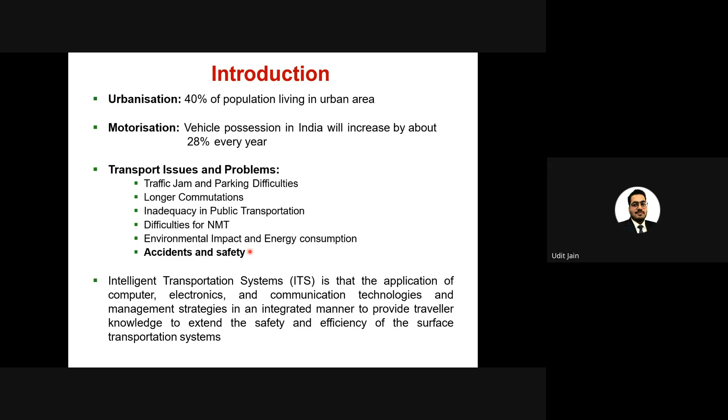If you look at the leading causes of death two decades ago, it was heart disease and cerebrovascular disease, which were the top ones, and road traffic injuries used to fall at around number nine. In the past two decades, it has already bumped up, and by 2030 it is expected to reach number five, bypassing major diseases like HIV/AIDS, stomach cancer, and diabetes. Road traffic injuries will be the fifth leading cause of deaths.

If you look at the fatalities of different types of road users, in different parts of the world the numbers and proportions are different. But if we look at Southeast Asian countries, where India also lies, 43% of fatalities are motorized two-wheelers and three-wheelers—they are the vulnerable road users. Whereas in other countries where the proportion of cars is much higher, in Southeast Asian countries the proportion of cars is just 16%.

So to understand road safety and its move towards sustainability, we have to first understand what we can do to improve safety, and then how we can bring sustainability into the safety of road users.

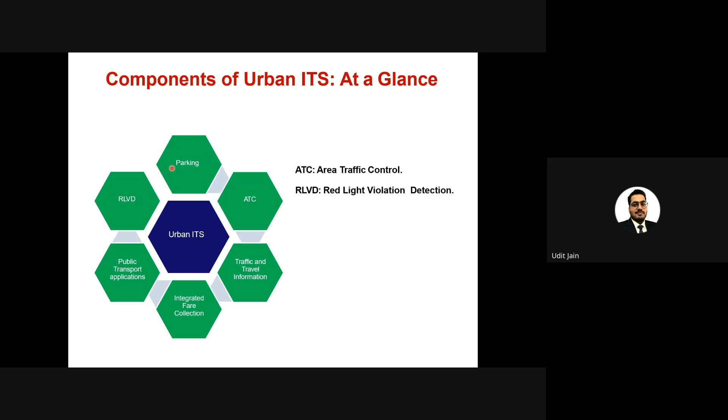There is much more in urban ITS which can help us in improving road safety as well as improving sustainability issues that are arising due to the increase in traffic and congestion happening due to the increase in number of vehicles and number of trips that we're making.

One of these components is advanced traveler information system, called ATIS. An ATIS can be utilized for two different purposes. One is a public transport system can use an ATIS where you can have real-time information about different public transport routes, upcoming arrivals, and how reliably the public transport system is following its pre-decided schedule.

This leads to a sense of reliability on the public transportation network. If you have traveled by a metro rail system versus a bus system, the primary difference is that metro systems have an inbuilt ATIS where even if you are not at the metro station, on your phone you can check when the next metro is going to arrive. And even at the station, variable message signboards show the next arrival in 5 minutes, 3 minutes, 2 minutes—it's written everywhere, and the metro actually arrives at that time.

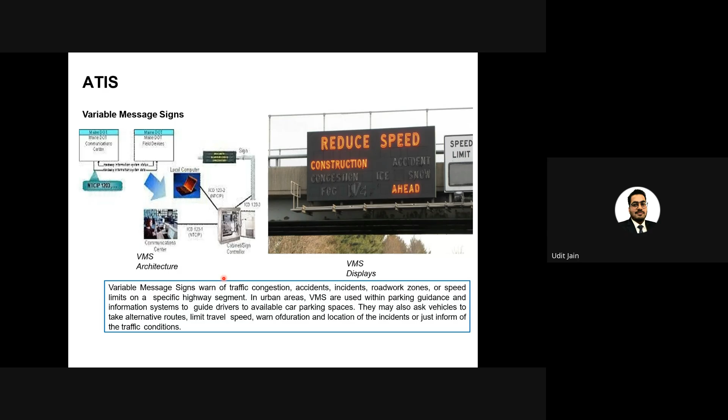The earlier versions of ATIS used to be signboards like this. Nowadays we have digital LED screens where we can display pretty much any kind of information for the road user. Earlier versions of ATIS also used to have radio channels where people could communicate with one another with the help of radio frequencies.

There are various kinds of ITS applications in transportation where we use different kinds of sensors for acquiring data. We use inductive loops, passenger counters, piezo sensors, lasers, radar, CCTV. There are so many things available today. For communication, the way vehicles communicate with each other has changed drastically. Data analysis and data mining have also improved many folds.

If we look at the traveler information system, the previous versions of VMS were quite rudimentary - fixed messages and radio waves used to be there. Now we have true VMS where we can display pretty much everything. We even have in-vehicle information systems where we can relay important information for drivers, giving them useful information at the right time, which can be very helpful for a driver to make correct decisions while driving.

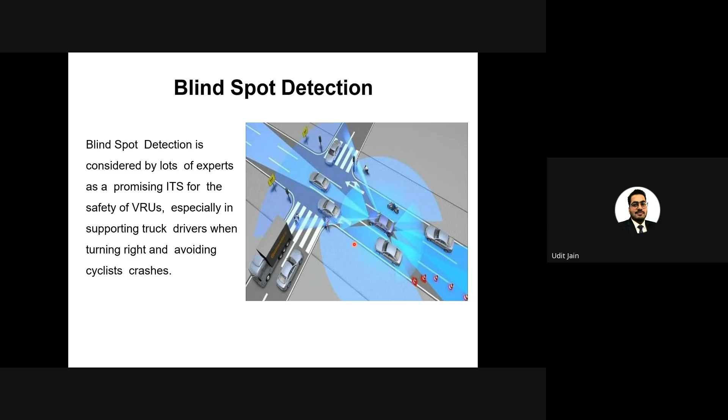In such scenarios for blind spot detection, ITS works very well. In the new cars coming after 2020-2022, since BS6 has been implemented, the technological advancements in cars have increased many folds. So several cars now come with blind spot detection. Earlier versions of cars used to have just parking sensors where if something came close to your rear bumper, your car would beep. Now you have 360-degree sensors where if anything is in your blind spot, any obstruction, vehicle, passenger or pedestrian, the driver will get alerts.

The alerts can be for a pedestrian, that's called a pedestrian detection system. It could be an alert in the form of a beep, or in the form of a flash, there can be various types of alerts. It can also be coupled with AEB, that is advanced emergency braking. So it's not just detection and alarm, it also takes control of the car to have automated emergency braking, ensuring that the vehicle does not hit a pedestrian or a bicyclist. These systems already exist.

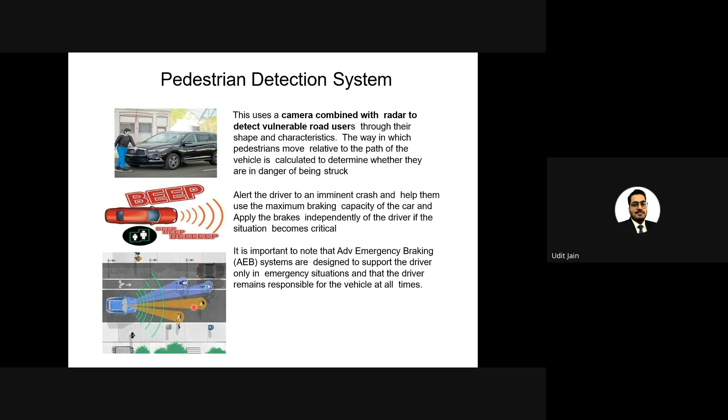If anybody is aware of ADAS level 2, that is advanced driver assistance systems, which are of this generation, coming in cars now. Various cars have launched ADAS level 2. Honda has launched ADAS level 2, the cheapest one you can find is in Honda Amaze. Then you can see ADAS level 2 in Tata cars, and in Mahindra cars. Obviously the foreign brands have had ADAS level 2 for a very long time, but I'm talking about Indian manufacturers. So ADAS level 2 has come into the Indian market, and Indian manufacturers have launched it with all these capabilities I'm talking about.

Then, pedestrian traffic signals. In most Indian cities, we either don't have pedestrian traffic signals, or even if we do, we don't really take them very seriously. A pedestrian traffic signal is generally coupled with the vehicular signals, and whenever the vehicular signal turns red, the pedestrian signal turns green. That's about what we do with the pedestrian traffic signal.

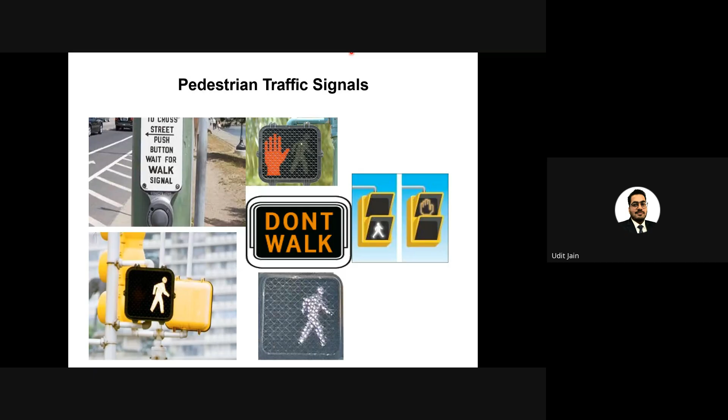But if you go abroad, if you visit Europe, UK, USA, and several other such countries where pedestrians are given a lot of importance and preference, you will find many different types of traffic signals which we don't have in our country. These are new for us, but they're quite old and useful, and people are used to them. They've been used for decades to ensure better pedestrian movement and safety. So we'll look at a couple of them.

One is an automatic pedestrian detection system, where with the help of either IR cameras or normal cameras using computer vision, one can detect that there is a pedestrian waiting or crossing, and accordingly the pedestrian traffic signal can be changed or exercised depending upon the detected pedestrian in the waiting area or the crossing area.

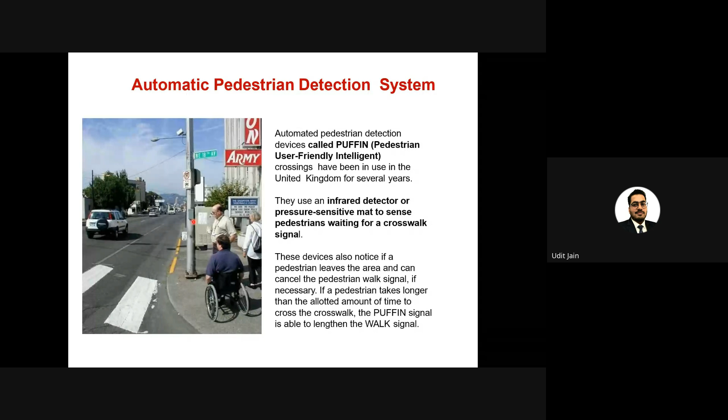Another form of pedestrian detection, the earlier one I was talking about, used infrared or computer vision cameras. The second one is with the help of a puffin signal, where puffin stands for pedestrian user friendly intelligent crossing. It's either an infrared detector or a pressure sensitive mat used to sense that a pedestrian is waiting at a crosswalk to cross the road. As soon as a pedestrian is detected, the signal cycle is automatically altered, and as soon as possible, a green phase is given to the pedestrian to safely cross the road.

Then one of the oldest types of pedestrian crosswalks is the pelican signal, or push button signal. You'll see a small box on either side of the crosswalk, and as a pedestrian, if you want to cross the road, you simply go and push a button there. After pushing that button, the signal cycle will be altered and a green phase will be given to the pedestrians who pushed the button to cross the road. This technology is called pelican crossing or the push button system.

At very few places in India this was implemented. I saw this once in Delhi near India Gate, but it was not successful, for two reasons: one, people were not aware what this is for, and secondly, even when the signal for pedestrians turned green, the motorists and vehicles did not actually stop to allow pedestrians to cross. These were the two observations for understanding why pelican crossings did not work. But that being said, these work beautifully in Western countries. I myself have traveled and used them, and if we press the button, within the next 5 to 15 seconds, we get a green phase, and vehicles do stop and allow you to cross.

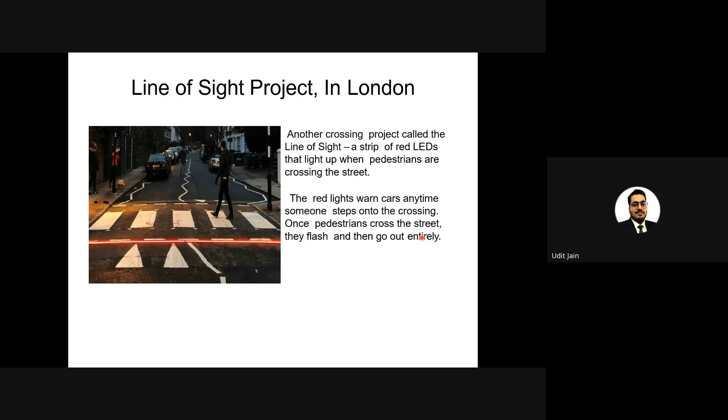This red light warns the cars anytime someone steps on the crossing, and once a pedestrian crosses the street, the lights flash and then simply turn off. So if there is no pedestrian, it would just look like a normal crosswalk.

Then again in London, there was another technology called the traffic tech switch pad. This pad detects whenever a pedestrian stands on it, and sends a signal to the traffic control lights, altering the signal phase whenever a pedestrian is detected. It can also cancel the signal if the pedestrian steps off the pad.

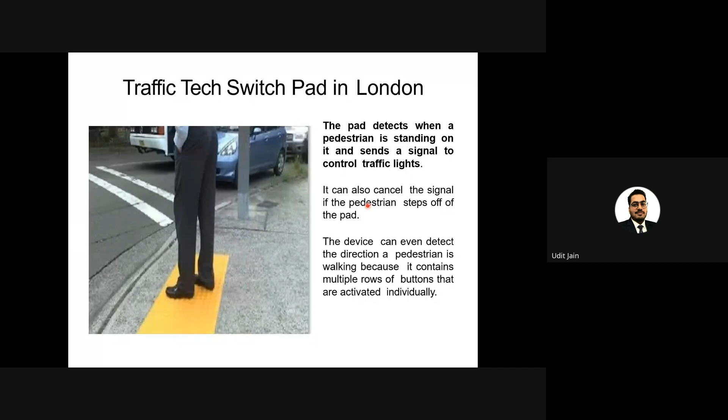The device can even detect the direction in which a pedestrian is walking, because it contains multiple rows of buttons that are activated individually. So this is like a pressure sensitive pad which detects if there is a pedestrian and in which direction they want to go.

Then there is the Starling crossing, which was also a very innovative way of ensuring pedestrian safety. If you step on the curb side where you want to cross the road, a crossing will automatically appear. It's a plain road, and as soon as a pedestrian comes, this crossing appears.

If a crowd wants to cross simultaneously, the crossing widens, and if someone staring at a smartphone veers into traffic, warning lights illuminate around them. These markings look similar to those usually painted on the road, but because they're created with LED lights, they can continually change.

This Starling crossing can be achieved either with LEDs or with projectors. Projectors would work only during night time, but that is where most safety issues take place. So a projector would simply project a crosswalk and the required illumination onto the road, allowing for a safe passage for the pedestrian.

Coming back to the advanced driver assistance system, that is ADAS. ADAS has evolved over decades. Earlier it was simple ADAS, then came ADAS level 1, then ADAS level 2. Now ADAS level 2 is in the market, commercially available in India as well, by Indian manufacturers.

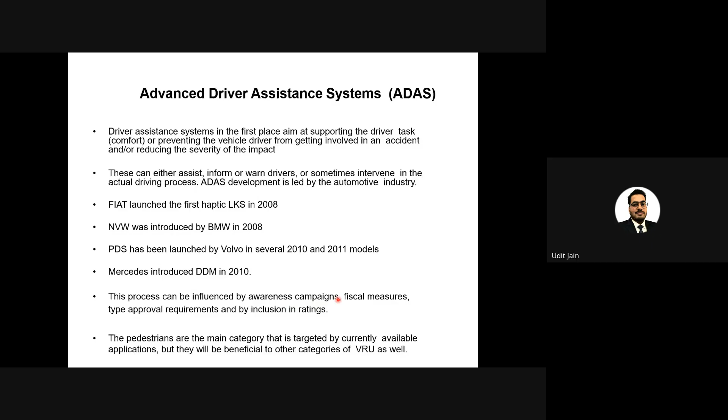NVW was introduced by BMW in 2008. Then PDS was launched by Volvo in 2010 and 2011 models, and Mercedes introduced DDM in 2010. We will look at some of these, and we even have some videos to show you. This procedure can be influenced by awareness campaigns, fiscal measures, and many other inclusion in ratings.

What an ADAS does is detect objects, detect hazardous road conditions, classify objects, and then either stop or slow down the vehicle if required. It is not just detecting objects and creating alarms. If it finds a hazardous condition developing, it can take control of your car, stop it, slow it down, or steer it to minimize damage. The first attempt is to entirely avoid the accident, either by braking or maneuvering, and if that's not possible, the idea is to minimize the impact as much as possible.

These have wide applications in blind spot monitoring, lane keep assistance, forward collision warning, and parking assist.

Blind spot monitoring we have just seen. Lane keep assistance means that if your vehicle is equipped with ADAS level 2 and you have turned on the lane keep assistance, your vehicle will keep driving in the same lane. If for any reason your vehicle tries to sway out of the lane, the steering will give you a haptic feedback - it will vibrate and slightly turn itself to keep your car in the traffic lane. That is lane keep assistance.

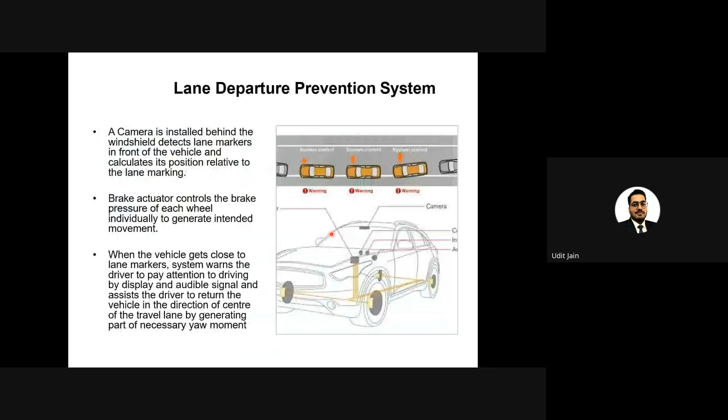Another application is advanced vehicle control. We just saw that by another name - it was forward collision warning.

Cruise control was there in ADAS level 1 also, where you can set a speed at which your car can keep moving automatically and you don't have to accelerate. But the problem is that if there is a vehicle in front of you, the car will not know when to slow down or stop - you will have to manually brake.

To solve that problem, ADAS level 2 now has AVCSS, Advanced Vehicle Control and Safety Systems. It detects how far the leading vehicle is from your vehicle, and depending upon a safety distance that you have set, if the leading vehicle brakes and comes too close, your vehicle will also automatically apply brakes and slow down. These anti-collision devices work together with cruise control to take partial control of your car, accelerating and braking automatically to maintain the same distance with the vehicle in front of you.

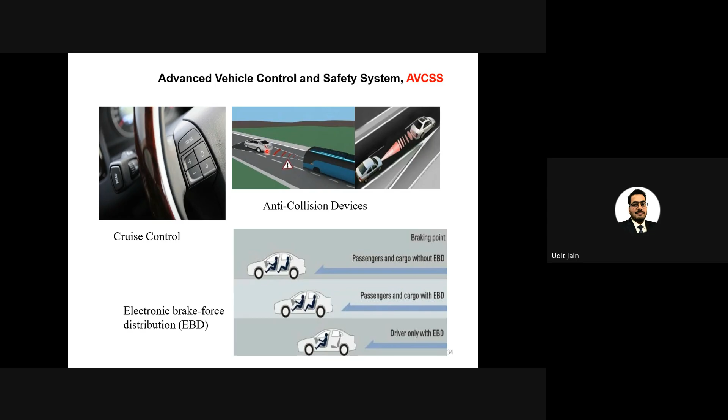Then there is Electronic Vehicle Stability Control, EVSC. This is a very interesting technology, and to the best of my knowledge it was first introduced by Mercedes.

Let's look at an example. Let's say I am this yellow car, and I see a vehicle that has broken down, and I have to suddenly change path. If at high speed I suddenly take a right turn, my vehicle can spin out of control and run off the road. An EVSC system does not allow your car to go off the road or spin like this - it makes sure your car smoothly transitions even at high speed and stays on the road.

It has yaw rate sensors which control the lateral acceleration of your car and make sure such scenarios do not occur. We'll see a short video of EVSC that will give us a good idea of what an EVSC system does.

As you drive, many forces act upon your vehicle. Is the video audible also? Yes, can you hear? Yes, it's audible and it's visible also.

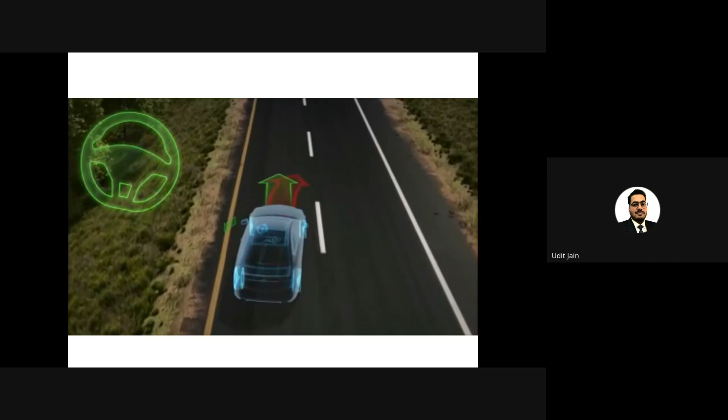As you drive, many forces act upon your vehicle. You probably feel some of them in everyday driving, like when you lean toward the side in a corner. When you turn the steering wheel, your car doesn't just move to one side, it actually rotates about a vertical axis. Under some conditions, the car might rotate too much or not enough, like when you swerve to avoid an obstacle, take a curve too fast, or encounter a slippery road. This is why Mercedes-Benz invented ESP, the Electronic Stability Program. ESP's network of sensors, one of the most advanced in the industry, continually monitors how well the car is carrying out the driver's orders. ESP compares your steering inputs to the speed of each wheel and the car's rotation. Within milliseconds, ESP can sense if the car is not following your intended course. When you quickly steer to avoid an obstacle, the car wants to continue straight ahead. ESP brakes the inside rear wheel. This creates a rotational force that helps the car steer where you tell it to. As you recover, the rear of the car can spin out. ESP brakes the outside front wheel to help rotate the car back on course. If necessary, ESP can also reduce the engine's power to help restore control more quickly. When the laws of physics meet human nature, ESP helps keep you on course and in control.

I hope that gave a clear idea of what an ESP is and what a vehicle stability control system does. The common commercially used name is ESP, and the technology is called EVSC, Electronic Vehicle Stability Control.

Another technology which is now very common in cars - it has been there in cars in India for the last decade, and now almost no car comes without ABS. ABS is nothing but Anti-lock Braking System, and I have seen many people don't understand what ABS does. This small image explains basically what ABS does, but better than this image will be another video with which I can demonstrate the importance of ABS in vehicles.

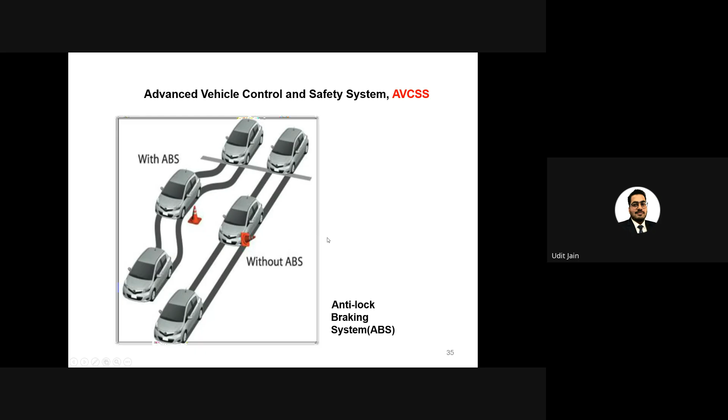Let me just play the next video.

When applying full brakes in critical situations, or when braking on slippery roadways, the wheels can lock. The vehicle can no longer react to the driver's steering because the locked wheels can no longer convey the optimum braking power and necessary turning force to the street.

It hence becomes nearly impossible to evade an obstacle. ABS, the anti-lock braking system from Bosch, prevents locking of the wheels. ABS ensures that the vehicle remains steerable and stable while fully applying the brakes.

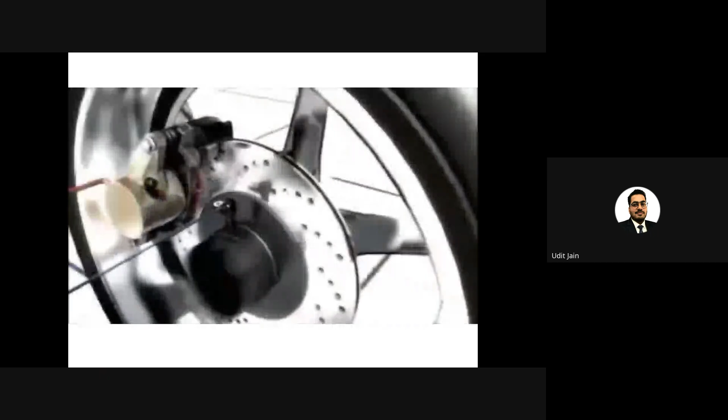The ABS control unit continuously monitors all wheels by means of wheel speed sensors. Should the system recognize that a wheel is locked, ABS immediately intervenes and systematically regulates braking pressure. ABS can regulate each individual wheel within milliseconds. With this electronic anti-lock braking system, a sort of electronic intermittent braking, ABS achieves stability and steerability with the shortest possible braking distance. Let's have a look at the ABS benefits in practice.

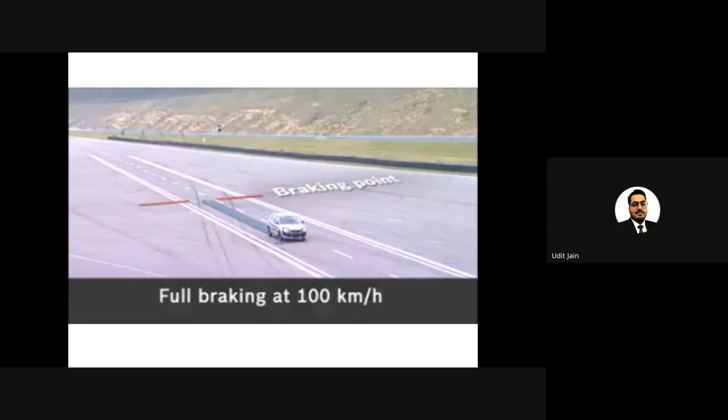Full braking at 100 kilometers per hour. With ABS, the braking distance is significantly shorter and the vehicle remains stable.

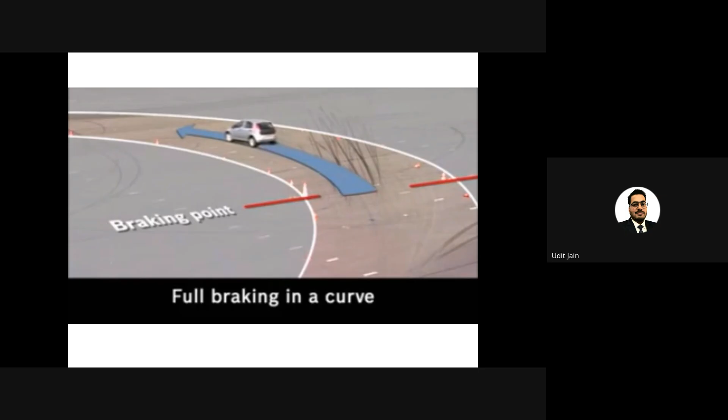Full braking in a curve. Without ABS, should the wheels lock while applying full brakes along the curve, the vehicle can no longer be steered and slips out of the curve. With ABS, you have the vehicle under control and you can steer systematically.

Full braking and swerving. Should the braking distance not suffice, the driver must swerve to evade the obstacle. Without ABS, the vehicle cannot respond to the driver's steering attempts. With ABS, your vehicle remains steerable and stable. A collision is thus avoidable.

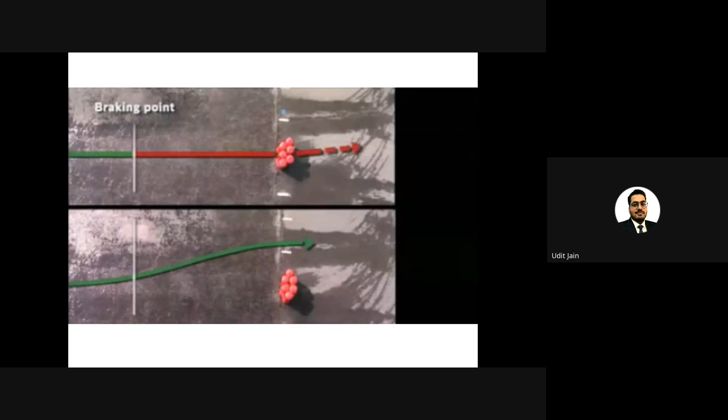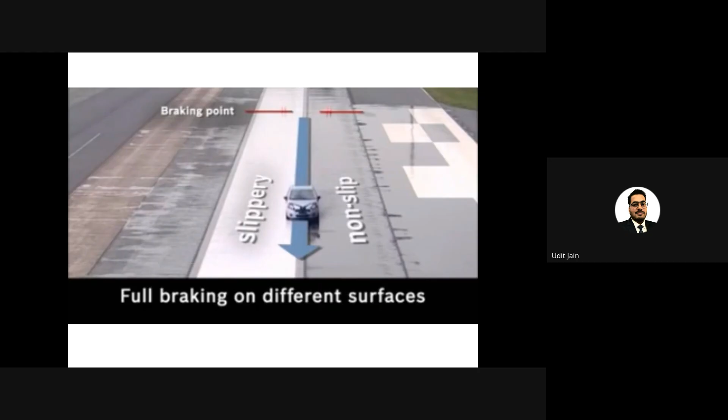Full braking on different surfaces. Traction on lanes may vary due to volatile weather, dirt, and foliage. When fully applying brakes without ABS, the vehicle can quickly become unstable. With ABS, the vehicle remains stable even in this situation, with an optimal braking distance.

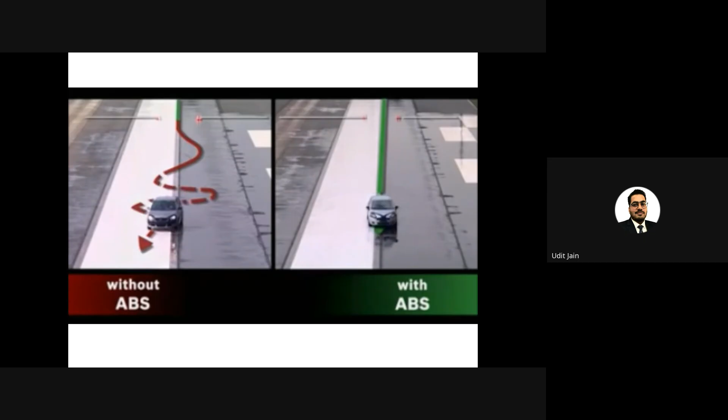In everyday life, these abilities of ABS are vital. ABS prevents the locking of wheels when applying full brakes. It shortens your braking distance and ensures that the car remains steerable and stable. ABS is essential for your safety. Safe braking with ABS from Bosch.

So I hope this video cleared a lot of ideas about what ABS does exactly. There are three basic points. One, it reduces the braking distance considerably. Second, it allows you to steer even while you are braking.

So if ever you have applied emergency brakes, if you apply the brakes very hard, your tires lock. And when your tires lock, you're not able to steer your vehicle. With ABS, you can steer your vehicle even when you are braking.

Third, when you have a slippery surface, that could be rain, water, snow, anything, braking on such surfaces causes hydroplaning, and again your vehicle loses control. With ABS, it does not allow your vehicle to lose control.

All this is achieved just with the help of a simple technology where the brakes are not applied continuously in an ABS system. It is triggered on and off, on and off, on and off at a very high frequency, which gives us all these three benefits with the help of ABS.

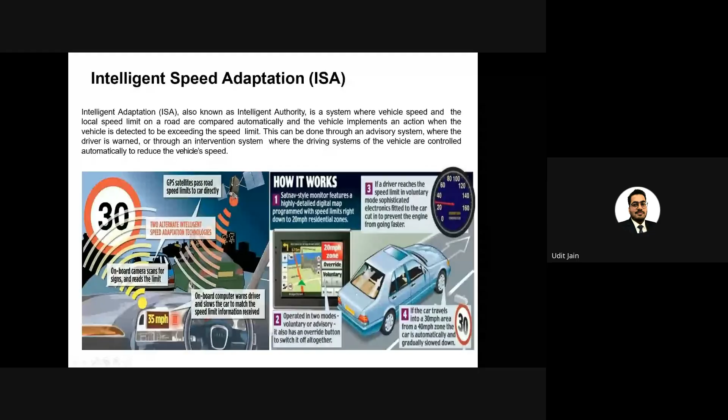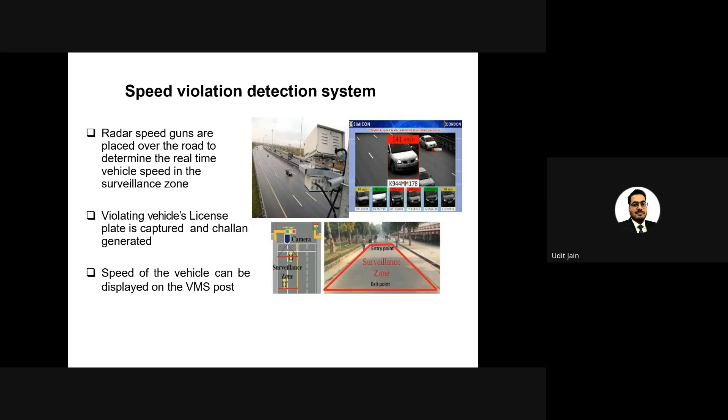Speed violation detection systems are now very common. I'm sure everybody must have either seen or themselves been subjected to a speed violation challan. These challans are done with the help of video cameras and even radar guns, with which they detect the speed of the vehicle as well as the number plate, and challans are created for vehicles exceeding the speed limit.

This is an example. You can see it gives the location, tells in which direction the car is moving, in which lane the car is, the speed at which the car is moving, and what type of challan has been created. Similarly, another example. With the help of radar guns and ANPR cameras, that is automatic number plate recognition cameras, this is a system which is very well tried and tested, and is now used almost everywhere in cities as well as on highways, very widely used to catch people who are overspeeding.

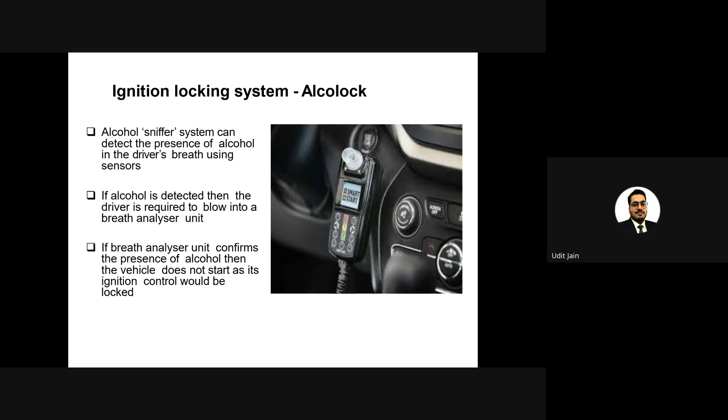Then seatbelt reminder - all of us have seen this, starting from BS4 cars to BS6 cars now. BS6 cars had seatbelt reminders for the front passenger and driver, and now BS6 Stage 2 cars have seatbelt reminders for all 5 or 7 seats in the car. So even if the rear passengers are not wearing a seatbelt, the car will continuously keep beeping, and unless you buckle the seatbelt, the alarm will keep going. That is the seatbelt reminder.

Then there's also a black box for cars. It is more or less similar to the black box we hear about in aeroplanes. This has all the vehicle kinematics data, and with the help of that data, the black box can be used in the case of some issue, accident, or fatality, where this data can be used to assess what actually happened.

Road safety is not just about using ITS or sustainable solutions to reduce accidents. There's a lot of behavioral issues too - that is the driving behavior of people, how they drive in different situations, which also leads to a lot of issues related to road safety.

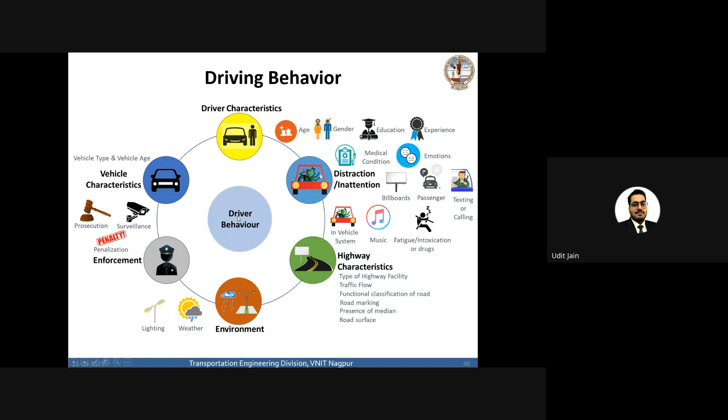Then strategies to improve driving behavior. We want our drivers to be more responsible - how can we do that? We can create driver behavior profiling and rating systems. We can have usage based insurance schemes. We can have eco driving rating criteria, and we can add ADAS, that is advanced driver assistance system.

So what is driver behavior profiling? Ellison in 2015 defined a driver behavior profile as a normalized score of driver behavior, which serves as a proxy for assessing crash risk by combining a number of measures of risk on a common scale across the drivers.

Cars are fitted with a GPS device which captures all the kinematics data of the vehicle - speed, acceleration, deceleration, jerk, yaw rate. This information is captured, monitored, and transferred to a server from where it is analyzed and drivers can be rated.

If somebody overspeeds quite frequently, they can be classified as an aggressive driver. If somebody accelerates very quickly or does harsh braking often, they can also be categorized as aggressive drivers. If somebody changes lanes very often, that is zigzag driving, that person may also be treated as an aggressive driver. Based on algorithms like these, you can develop a driver behavior profiling or rating criteria, which can then be used for controlling the way drivers behave.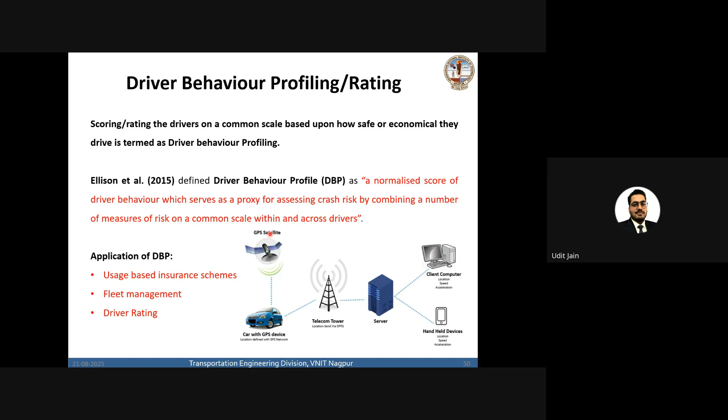One of the easiest ways to do this, and one of the ways it's being done in Western countries, is motor insurance - the premiums we pay are linked to how we drive. There are three motor insurance schemes in Western countries.

One is pay as you drive. This means that if you drive your vehicle more, you pay a higher premium, because the more you drive, the chances of an accident occurring automatically increases. So if one person drives their car maybe just 1,000 kilometers in a year, as opposed to another person who drives 20-30,000 kilometers in a year, obviously the insurance premium for the person driving more should be higher. That is PAYD, pay as you drive scheme.

Then you have PHYD, pay how you drive scheme. In the entire year for which you have insurance, the company will monitor your speed, acceleration and deceleration. At the end of that year, it will assess how you drove. If you drive responsibly, within the speed limit and not aggressively, your premium will be lesser. If you're overspeeding and driving aggressively, your premium will be higher.

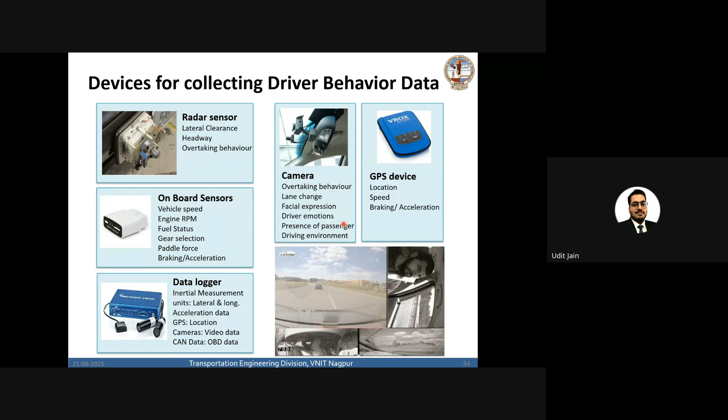As I said, there are various devices for collecting such driver behavior data - radar sensors, onboard sensors, GPS data loggers, cameras, GPS devices. There are many such things. At my institute at VNIT, we have several of these, and we've done various studies related to this.

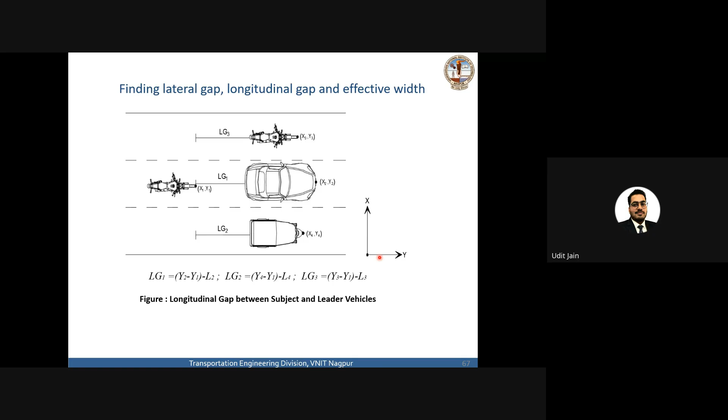One of the studies was traffic lateral shift, where we collected data at different locations. Basically we wanted to assess the longitudinal gaps between vehicles and the lateral clearance. Lateral clearance is the lateral gap between vehicles, and the lateral distance they're maintaining with the median or the curb. This tells us how many times people are driving very close to one another, how many times they are changing lanes. This can be a very good way to understand aggressive behavior of drivers.

Another problem that we took up was helmet detection of two wheelers using image processing and machine learning.

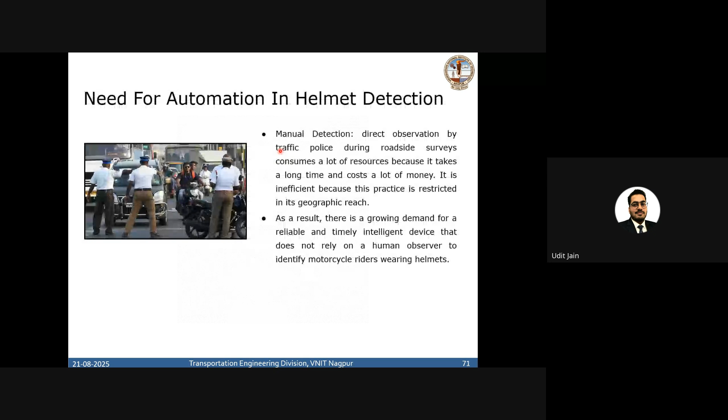So we are all aware that two wheeler riders do not like to wear helmets for various reasons, but we all know the importance of why we should wear a helmet.

So we used image processing and YOLO V4 at that time when we developed this, and we wanted to identify from the city's CCTV video feed whether people are wearing the helmet or not.

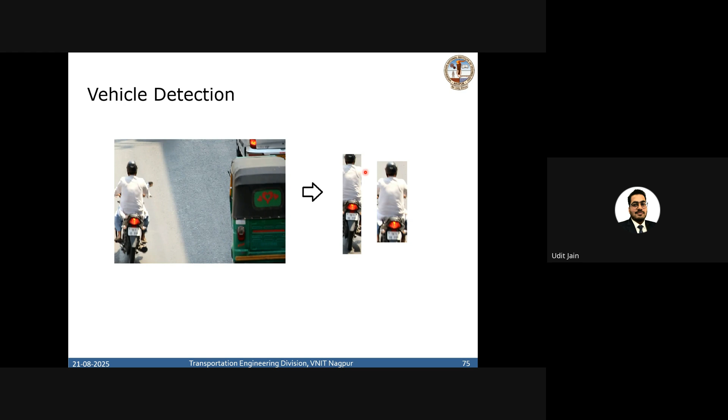So first we did vehicle detection. We identified two wheelers, then cropped the image to just keep the two wheeler and the number plate. You can see another vehicle where the person is not wearing a helmet. So we cropped all these images of two wheelers, with helmets and without helmets.

After getting those images, we identified the region of interest, usually the upper part of the image, that is 1/4 of the image, where only the head was captured. With this, we created a data set like: with helmet, with helmet, with helmet, without helmet, with helmet, with helmet.

And we trained this machine learning algorithm to tell it in which cases a person is wearing a helmet and in which cases the person is not wearing a helmet.

In the entire data set, we used over 3,000 images, almost 2,000 images of people wearing a helmet, and 1,200 to 1,300 images of people not wearing a helmet.

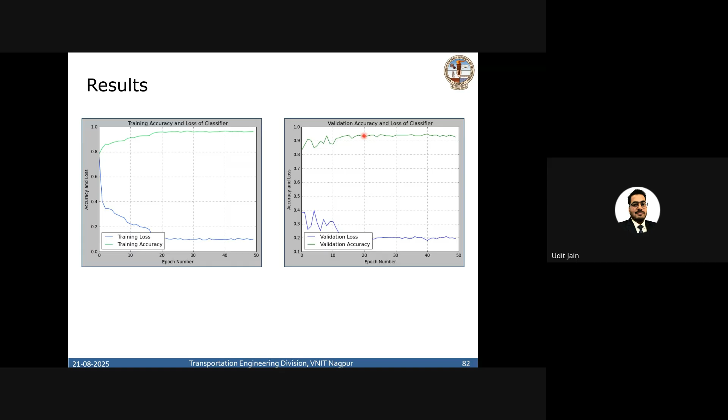But this is the device, an in-house device that we have made. It can collect all the traffic data, classify the vehicles, count the vehicles, calculate their speed, and calculate all their kinematics - speed, acceleration, deceleration, and lane change behavior, everything.

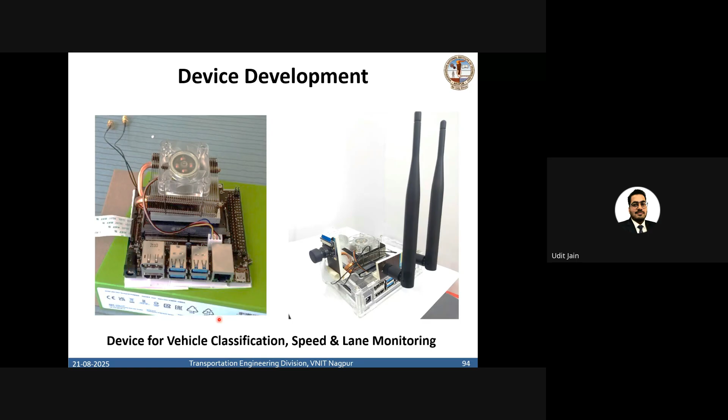This is a deployment of the device. I think I might have a short video, maybe that will give a better idea.

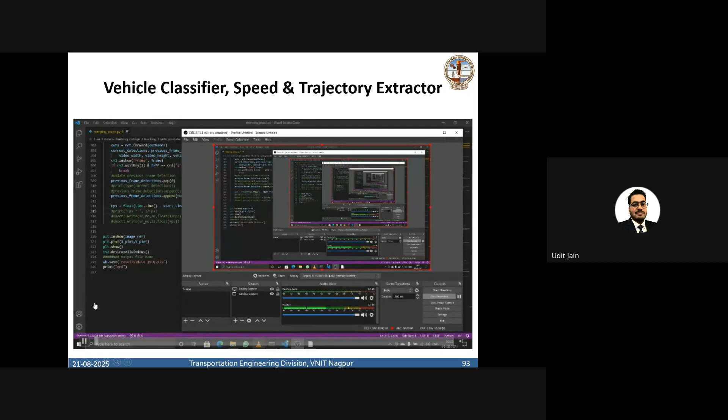So you can see in the region of interest, vehicles are detected. There's a bounding box that will come around the vehicle like this, and all the speed profiles and classification of the vehicle will be done.

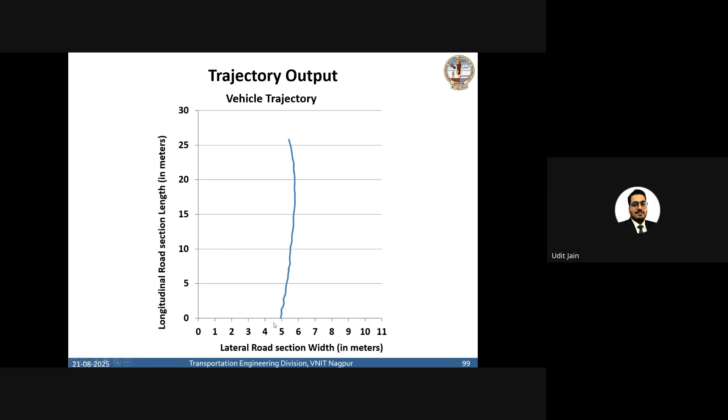This device also gives outputs like trajectory output of the vehicle. So if a vehicle is moving in a certain trajectory, that trajectory is plotted. It gives the speed profile of the vehicle, and this can also be used to create acceleration and deceleration profiles. Endless things can be done with this data.

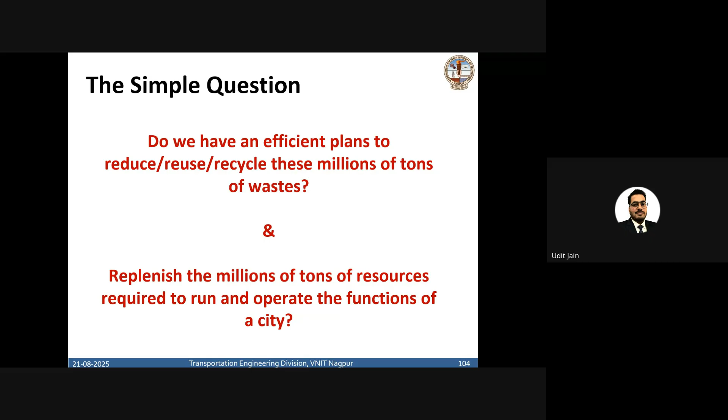So the simple question that we have is: do we have efficient plans to reduce and recycle the various tons of waste and emissions being created by these transportation issues? Can we utilize the existing resources to meet the needs of the present generation without compromising the needs of future generations?

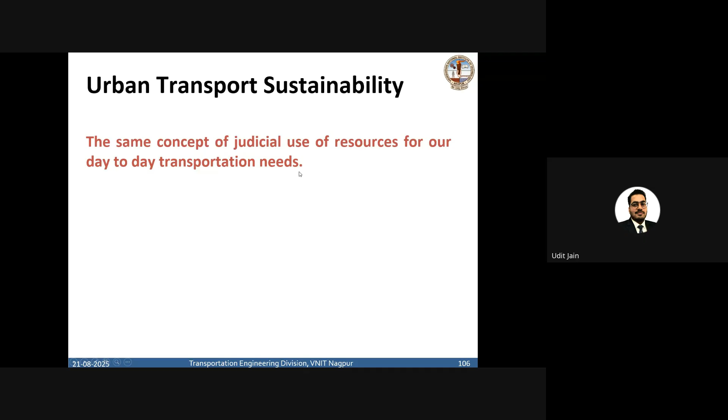Urban transport sustainability basically talks about the same concept, that is judicial use of resources in our day-to-day transportation needs. Transportation is one of the biggest contributors to global warming and carbon footprints in the world, and there's a very strong need for sustainable transportation planning and execution.

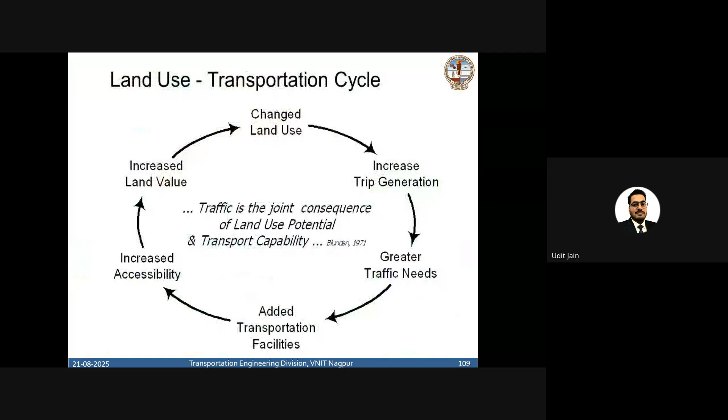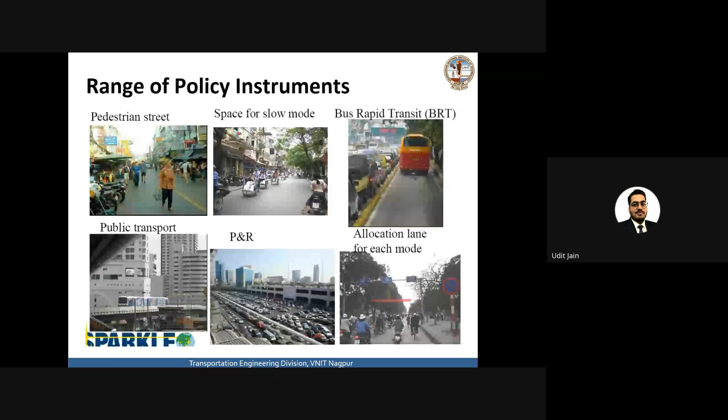Okay, I will skip through some of these slides. I will just come towards the range of possible solutions that we have.

Policies for sustainable transportation and road safety can make a huge difference. Policies can be short term, like parking fee regulation, vehicle health certificate and registration policies, and vehicle ownership policies. What is parking fee regulation? In a congested commercial area, if I increase the parking fee to a very high amount, it discourages people from using private vehicles, so people will find alternate ways to come to the commercial area.

Then vehicle health certificate and registration policies - they are already being implemented very strictly in Delhi and even in other parts of the country.

In Delhi, it's 10 years for diesel vehicles and 15 years for petrol vehicles. In other parts of the country, it's 15 years for all types of vehicles. But if you want to extend the life of your vehicles beyond that, in Delhi it is very difficult. In rest of the country, you can get a vehicle health certification, and if your vehicle is really in good condition, only then you're allowed to further extend the life of your vehicle.

Medium term policies include congestion pricing and incentivizing carpooling and car sharing. Congestion pricing means that if an area gets too congested, we can levy an additional fee or tax for entry into that area. Then, if somebody is carpooling or car sharing on their day to day trips, like work trips or education trips, we can find ways to incentivize them.

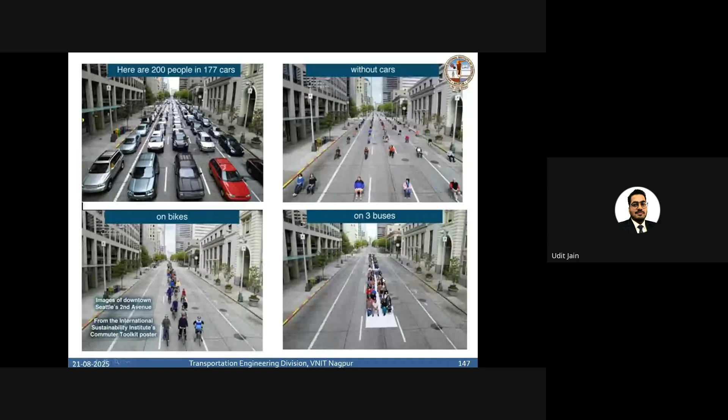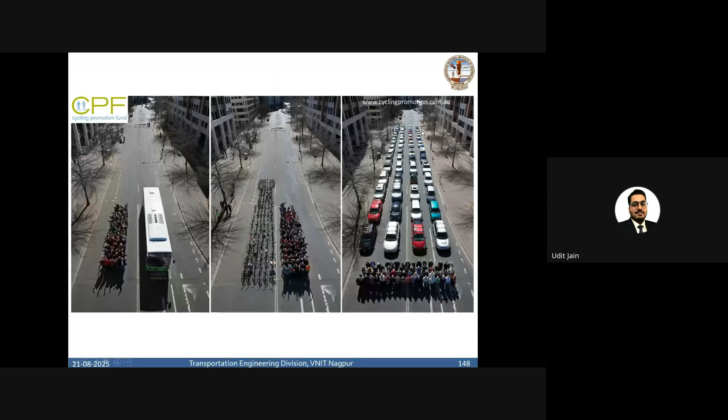Lastly, understanding carbon footprints. The average conventional cars that we have, have the largest carbon footprints - they're emitting almost 240 grams of carbon dioxide per kilometer that they drive. The top range EVs are often called very sustainable and eco-friendly, but are they really? No. They are also emitting 209 grams of carbon dioxide for every kilometer. The reason is because the source of electricity is still fossil fuel. We have very little energy being generated by renewable sources. So if we are still burning coal to generate electricity, EVs are of no use if we look at it from the perspective of sustainability.

Dual occupancy cars simply reduce your emissions by half. A motorcycle is even lesser. Public transportation systems like trains, trams, and buses are much, much less in terms of their carbon footprints. So our travel choices: use public transport for daily long trips, use bicycle or walking for short trips, use e-vehicles or hybrids as personal travel modes, but also ensure that the source of electricity is renewable - it's green. Choose cleaner fuels, avoid unnecessary trips, and avoid idle running of vehicles.

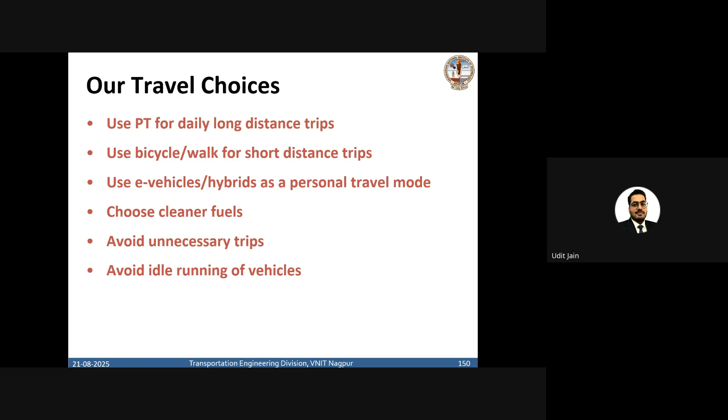With this, I will conclude my session. And if there are any questions, queries, or anything which somebody would like to discuss, please most welcome to ask me anything you want.

Sir, good afternoon. Sir, good evening, sir. Professor Khelde, yes, is sir here? Sir, yes. I wanted to add one question, sir. Like, if we want to conduct a road safety audit for urban areas, is there any special body which is working for this kind of audit, sir?

Yes, so every road that is being constructed, it is mandatory to now conduct a road safety audit. For highways, it has always been there. For urban roads also, now we need a road safety clearance. The problem with urban roads is usually they are not new roads - they will either be an upgradation, some widening, or some refurbishment of a road. So road safety audit may not always be mandatory, but it is the road agencies who own the road, like in case of Nagpur it could be Nagpur Municipal Corporation, NIT, or NMRDA, who need to conduct road safety audits and ensure that the roads are safe.

Sir, are there any special courses or series of guidelines we have to follow, or do we have to conduct any kind of practitionary course to become a specialized road safety auditor?

Can you see the second slide now? Yes, sir. Second slide is there, introduction. When you make it full screen, it becomes second window, so you have to go back to Google Meet and present the second window. Now I have shifted my second screen to the first screen. Can you see if it is moving? No, sir, it is the first one only, the second introduction slide. Now it is moving, sir.

Can you see what you can see now? In your introduction slide, we are seeing the map of India, then another image. Can you see the 25%? Yes, second image also we can see. Now we are on the second slide, there is a third image I am showing. On the second slide, how many images can you see now? We are seeing 6 total images on the second slide.

Now can you see this driver, road safety, vehicle, road? No, sir. Just a minute. Let me reshare, I am resharing it, just give me some time.

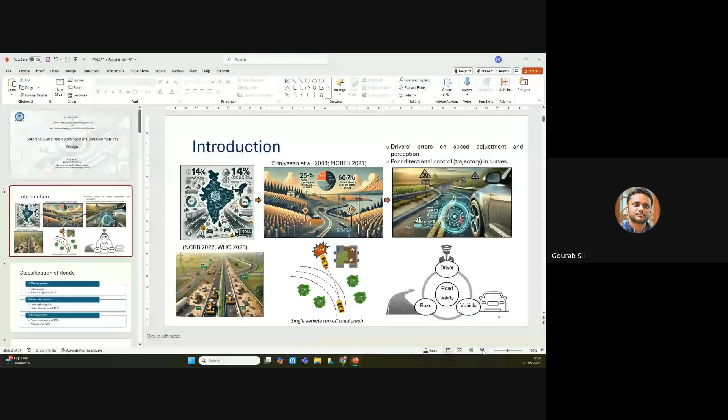Now can you see that I am moving my animations? Yes, sir, now is it working? Now it is working fine, sir. Slide number 3, can you see? Yes, now it is moving, right? Moving properly, very good. Thank you so much. Thank you for letting me know.

So now coming here, I was discussing about the motivation or introduction of this research topic. What I want to say here is, as I mentioned, around 14% of the global crashes are happening in India, and out of those, 35% are happening on the highways and expressways. So it is a matter of concern.

Further, if we go in depth and analyze the data, what we found is that 25% of crashes are happening on the curve section, horizontal curves basically. And out of these fatal crashes, these are the deaths actually due to accidents on horizontal curves. And surprisingly, 60 to 70% of crashes are single vehicle run-off-road crashes.

So if you ask me what is a single vehicle run-off-road crash, if you see the image at the bottom side, there is a yellow car moving and going out of control and crashing with a roadside object. What is happening here is that the driver is only interacting with the road environment. When the road is completely empty with no traffic, the driver will be influenced only by the road environment. If you then put some traffic on the road, there will be another kind of influence from the traffic.

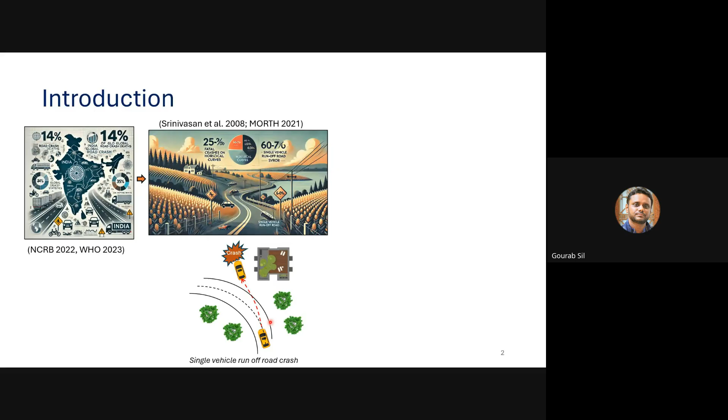So vehicles are going out of control when drivers do not interact properly with the road geometry and road environment, and they perceive, misjudge, make some mistake, and go out of the carriageway. So these are the possible reasons: drivers' errors in speed adjustment and perception when they cannot interact properly with the road geometry. Similarly, directional control, their trajectory on the curve, is one of the important factors. If you are driving at high speed and cannot properly maintain your trajectory, there may be some stability issue and you can go out of the carriageway.

So now these slides show that road safety is primarily influenced by three major factors. Although I have already discussed it, again with this image I want to clarify it to some of the audience.

So in road safety or highway safety, these are the three main stakeholders: driver, vehicle, and road. The vehicle, like the ABS system, vehicle technology, is actually automated. And another is road design.

This road design is where our civil engineering plays an important role: how to design the road that can accommodate most drivers and maintain safety. Similarly, the vehicular industry considers how to design vehicles so they can properly interact with road geometry, road environment, as well as the driver. So it is a complex system.

But as civil engineers studying transportation safety and road safety, we look into this factor. In our studies, we make the vehicle characteristics constant or fixed, and we try to understand how the road is going to impact the driver and make the road safer.

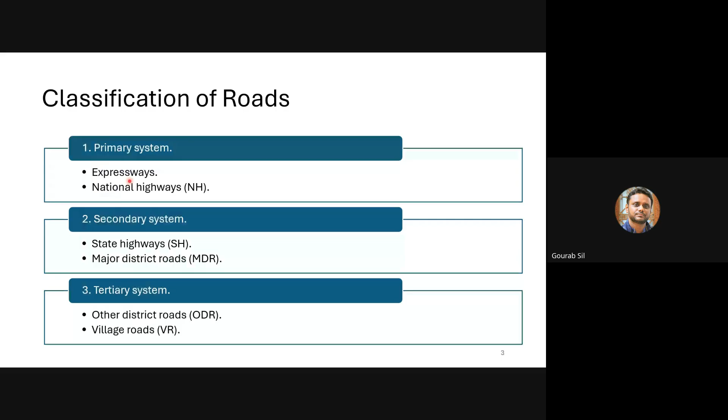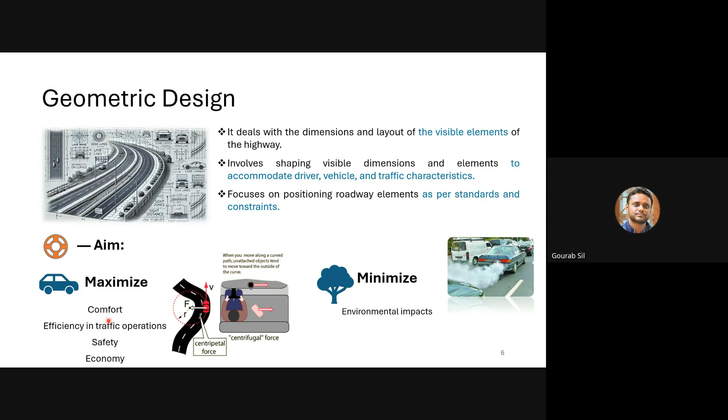The fundamental aim is to maximize the comfort, efficiency of traffic operations, safety and economy, and minimize the environmental impact. As a civil engineer, when we develop or design any road, we should aim for maximizing these parameters and minimizing environmental impact.

So now let's discuss visible road elements. I have listed some visible road elements under different categories. First, road components: the pavement or surface of the road, the carriageway, is one visible element. That also has some guidelines.

Similarly, shoulder is the extra widening provided along with the carriageway on both sides of the road. That is called shoulder, median, roadside object.

Coming to pavement marking, like markings on the road, we have center line marking, lane marking, crosswalk markings. All these things interact with the drivers.

Similarly, traffic signals, other signages, road alignment are other features like horizontal alignment, vertical alignment, roadside safety features. In this lecture, I will primarily talk about these road features, but there are many other components also.

So now, as per IRC 73, this is the cross-sectional element as I mentioned. In this slide, you can see the cross-sectional element where this road is a 4-lane divided highway, with 7 meter carriageway width because 2 lanes of 3.5 meter each on both sides, plus paved shoulder and earthen shoulder. This is called the cross-sectional element.

Similarly, another design parameter is sight distance. The minimum distance required to take a decision is called decision sight distance. Similarly, the distance required to stop your vehicle is called stopping sight distance. So these are all geometric elements.

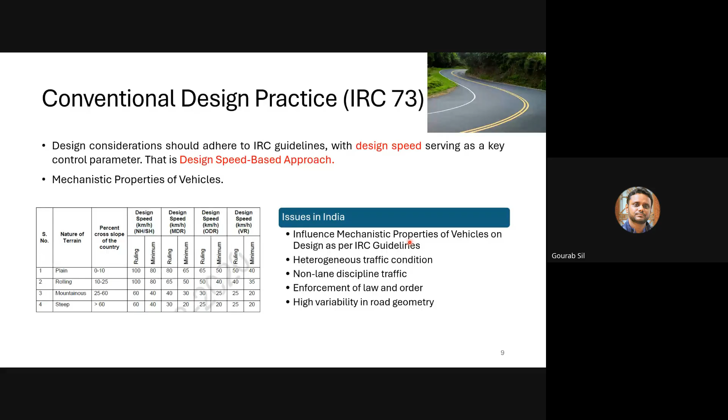So what are the issues in India? We understand that if we use these fixed values, the influence of mechanistic or mechanical properties of vehicles is going to impact that design standard. Similarly, heterogeneous traffic conditions in India are going to impact non-lane discipline, enforcement of law, and high variability of geometry. These are some issues to tackle such problems.

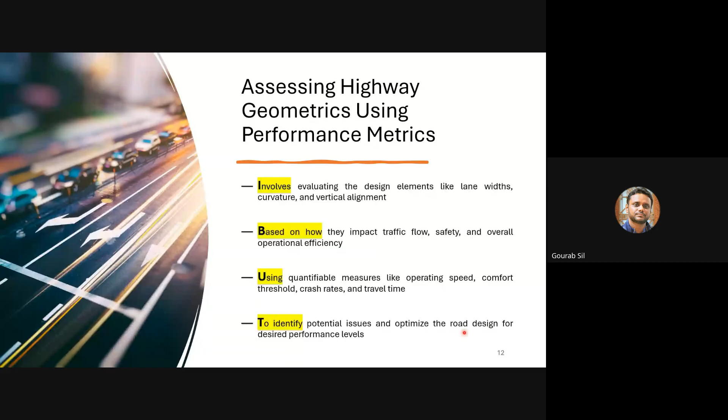Through this indicator, we can do some research, data collection, and understand what the drivers' operating speed is across the driver population. Similarly, for a given geometry, what comfort threshold are they facing. We try to understand those parameters and incorporate them into the conventional geometric design, finally aiming to identify potential issues and optimize road design for desired performance levels. These are some performance metrics prepared by some of my PhD students.

Highway safety can be evaluated using a surrogate measure as well as a direct measure. Direct measure uses accident data for analysis.

Surrogate measure, highway consistency, can be divided into two sectors: consistency through driver behavior and consistency through geometry. Consistency to driver behavior can be broadly classified as speed consistency, dynamic consistency, driver workload, driver perception, and decision-making comfort. Consistency to geometry consists of alignment consistency.

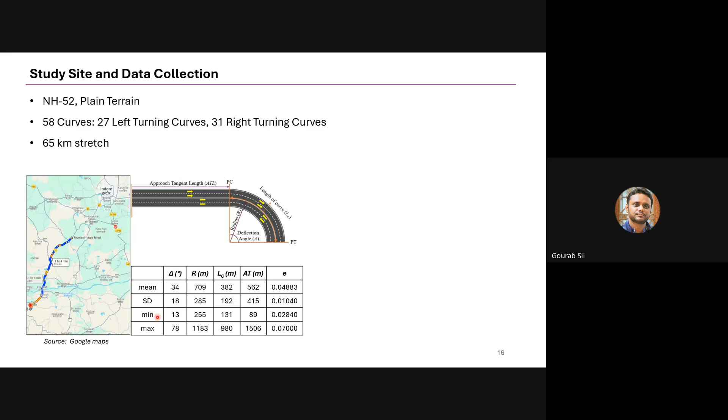This is the descriptive statistics. For all 58 curves we considered, it gives us mean, standard deviation, minimum, and maximum values.

We developed an instrumented vehicle providing 4 cameras, some GPS-based devices, some laser sensors, and proximity sensors. A total of 34 participant drivers were asked to drive this instrumented vehicle, and we captured their speed and lateral acceleration profiles.

Now, speed reduction modeling for independent TC, meaning tangent to curve - this is T, this is C - that's why it is called TC transition for design consistency.

For that we estimated delta V, the speed drop. Vt max is the maximum speed on the tangent, recorded as 112 kmph, and immediately after entering the curve, the minimum speed Vc min was 94 kmph. The subtraction of both gives us the speed drop. So we are trying to understand how the geometric characteristics of the curve influence their speed characteristics.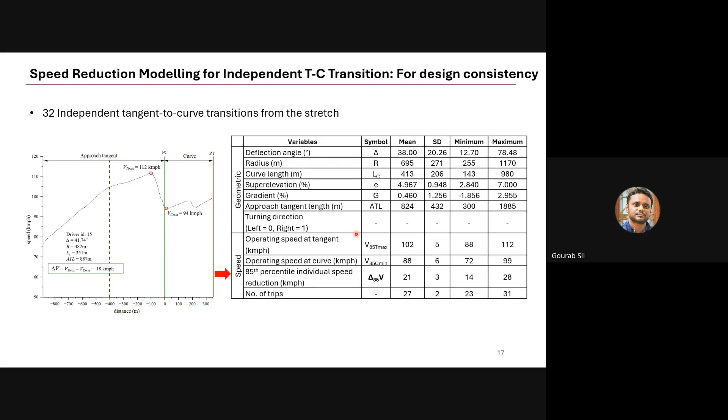After collating all this data, we're trying to develop some models and predict how, suppose this equation, this is y equal to mx plus c, a simple linear equation. So if we want to understand y, what is the speed drop for a given geometry, suppose this delta value and r value we are getting for conventional geometric design.

We put this value here and we predict what will be the speed drop. If we find that speed drop is very significant, in that case we can say that the geometry is going to be inconsistent, and that may create road runoff crash-like situations.

Based on this data point, what we have done is we have developed this kind of heat map. If you see, the x-axis consists of deflection angle and y-axis is the radius, and this scale gives us the yellow part giving the most speed reduction value, and this blue color, the bluest, gives us the least speed reduction value. So this is the region which gives us the more inconsistent design zone.

For example, if we are taking a deflection angle of 75 degrees and radius of 200, it is going to give us a huge speed drop, like around 26 kmph, which is not desirable. If the road is consistent, a driver is not going to drop speed that drastically. Something like 10 up to 15 can be acceptable, but 26 or 30 means something is wrong with the geometry.

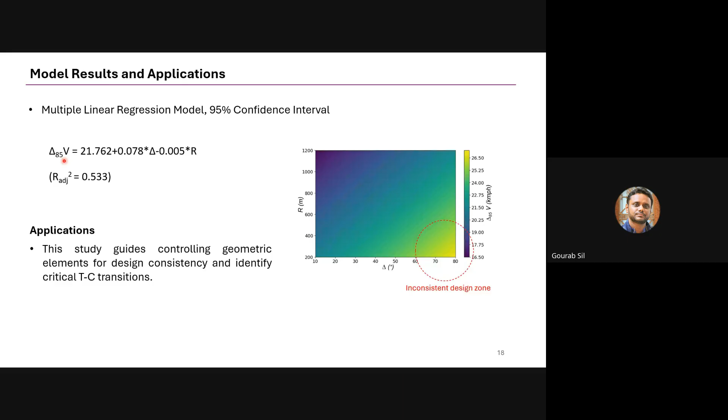So here what we estimated earlier was del 85V. Del 85V means 85th percentile speed drop. Suppose there are 34 drivers, the 85th percentile of these 34 drivers gives the speed drop that we estimated here. And in the second study we estimated the 85th percentile of the maximum speed drop.

In this study, what we estimated is MSR, which identifies the maximum speed over 300 meters. So this PC is the starting of the curve, PT is the end of the curve, and before PC this is the tangent location. So what we have done is gone through the upstream up to 300 meters, and we try to capture what is the maximum speed in that location.

So that maximum speed up to 300 meters we captured is called VT 300 max, and inside the curve we recorded the minimum speed. Using this simple formula, the subtraction, we estimated the 85 MSR.

So what we can see here, earlier was del 85V or del V85, and 85 MSR. You can see how much underestimation we have done in case of del V85, whereas 85 MSR gives us the actual value, what is the actual speed, more speed reduction. So this is not underestimation.

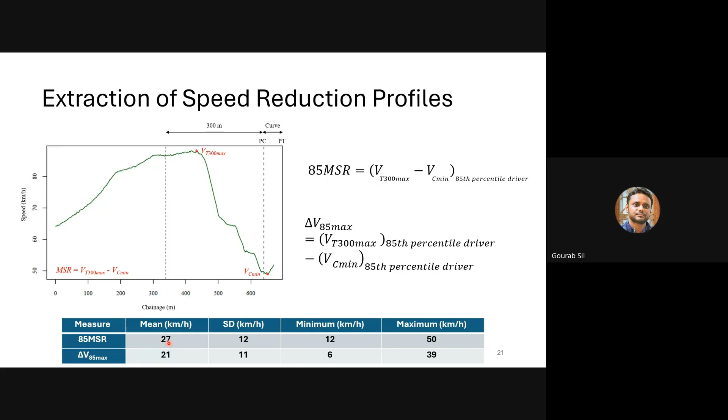So using this we have estimated del V85 and 85 MSR. These are the variables again, geometrical variables for this study, and we have developed this 85 MSR model because MSR gives us the more conservative side, as MSR gives the higher value, and we should always design for the critical value. So as 85 MSR gives us the most critical value, that's why we consider taking it as our measure.

So going through that, for the 85 MSR model, we have done some regression. We have run through some regression techniques like forward and stepwise regression, backward elimination, and all subset techniques.

Based on that, we developed this model, and we find that this model has been found from the all-subset or backward elimination model. Finally, using this model, we try to develop some application-oriented tool.

So if you see, this is in the 3D view. Here we get three parameters in this model we selected: radius, GAT means gradient of approach tangent, GC means gradient of the curve, and E is the super elevation.

These are the three predictors we have obtained. Based on that, a particular 3D plot has been developed for a particular GAT, 2.5%. So for this value, this axis gives us GC, gradient of curve, this axis gives us R, radius value, and these are the super elevation values.

The green portion, any point inside it, is giving us 85 MSR between 0 to 10. As far as safety or consistency is concerned, normal practice rule is there: if the deviation is within 10 kmph, we can consider it consistent, or rather surrogate safety oriented. This is safe.

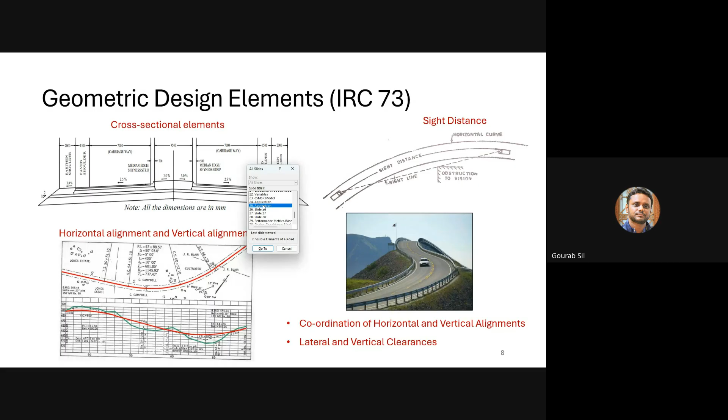From the conventional design method, we get parameters like deflection angle, point of curvature, length of the curve, and other parameters. Taking those values from the conventional design, we put it here - what is the gradient, what is the super elevation value - and we try to understand how the driver will behave for those given conditions.

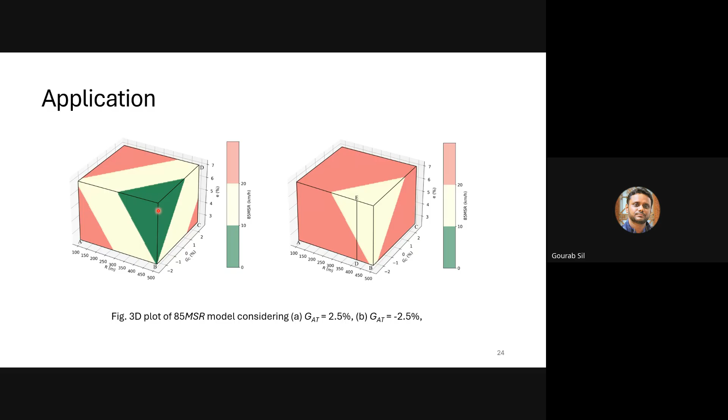We can understand, yes, if we give some geometric design values based on the conventional design, that may be inconsistent, but if we give this kind of value, it will be consistent. So this is one step further, combining with the conventional design.

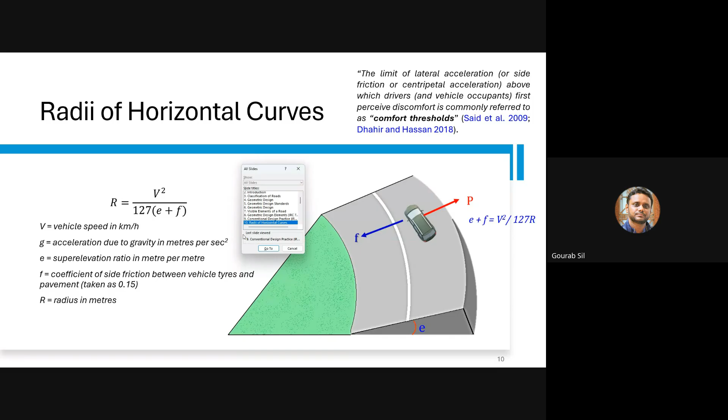So coming to the last lap of my discussion, after the application, this is the study. Here we are talking about work done using that frictional value. This is comfort threshold modeling at curves, the vehicle stability and friction demand. This comfort threshold is related to vehicle stability and friction demand. When the friction demand is high, at that time drivers start to feel discomfort, that's what I discussed in the last slide. So similarly, in this study, we have taken a total of 58 curves, similar to the data points we discussed in the first study.

85th percentile of comfort threshold, that is acceleration, 85th percentile of acceleration value, that is lateral acceleration, and no significant difference. We selected right turning and left turning curves and compared them using a t-test, to see whether a driver taking a right turning curve or a left turning curve differs.

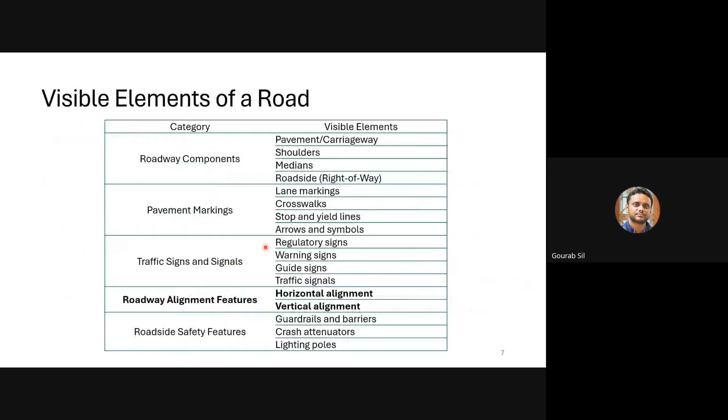So what does our guideline say? This guideline, in both current and revised versions, says that minimum desirable horizontal curve radius is about 400 meters. They are proposing this 400 for plain and rolling terrain, for both highway types - two lane as well as four lane. We should go for a desirable minimum of 400 meters. Again, this 400 minimum desirable radius is applicable for both two lane and four lane.

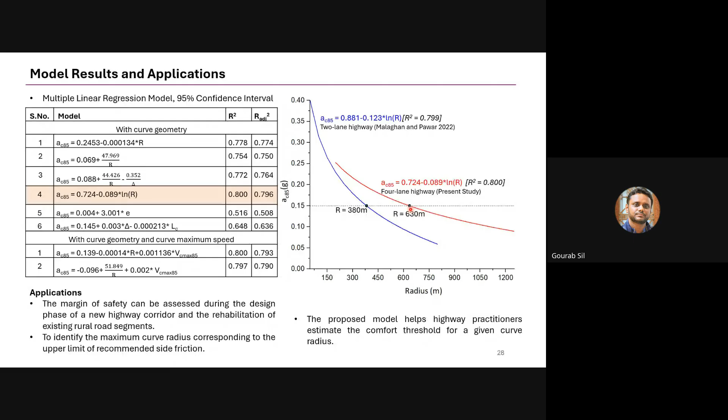But what we find from our study, if you go back to that slide, is that 400 is almost matching with the guideline for two lane, but for four lane it is not matching - our demand is it should be minimum 630. This is the research outcome we find, and we will try to deliberate on that. This is a very preliminary result, and it may further change with more data. But some interesting trend we identified from this study is that the value suggested in the guidelines may need some interventions.

So whatever studies I have discussed, these three studies - and I mentioned this black part, select initial design speed - that we did as per the conventional geometric guideline. Similarly, select the design values of super elevation, that is E, friction value, or R minimum. This is all as per conventional design.

Now, where I start my research discussion, I mentioned performance metrics based geometric design. So what we are doing is evaluating these things using performance metrics like operating speed drop and the coefficient of friction, or this comfort threshold we discussed. Based on that we are evaluating. When we find these performance metrics are consistent with the conventional design, if yes, our conventional design is good, we can go for that.

But here from our research, we are adding one more loop into that. If it is not consistent with the conventional design, if there is some consistency issue, then again go back and refit your E, F and all the design values until this becomes consistent and the final design is executed.

The overall topic of today's lecture or workshop is sustainable design or safe design. So this discussion is about how we can make the existing design more sustainable and more human centric. Obviously physical sciences will be there, the Newtonian mechanics will be there. Apart from that, we need to also include driver behavior and check whether the conventional design is giving us a safe facility with respect to driver behavior. So this is the red part of what we have done in our discussion.

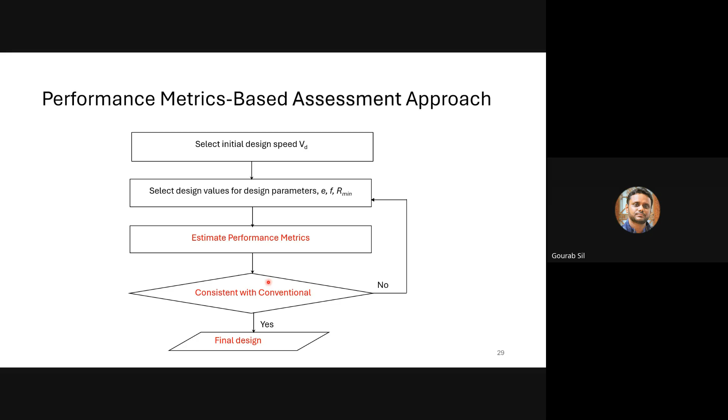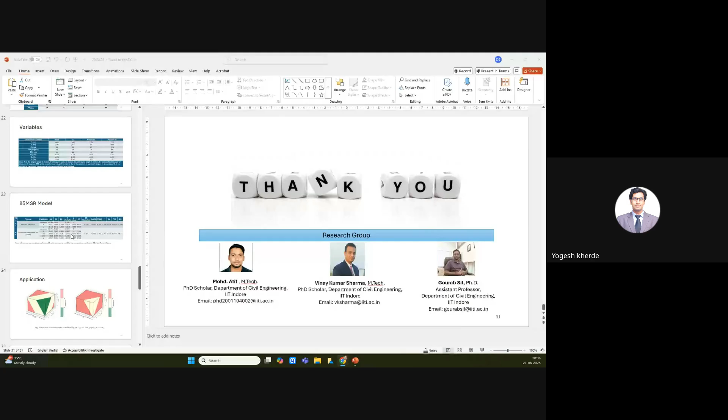One more thing, sir, I'm finding a research gap here, that in our Indian condition we do not have that particular handy equipment to identify friction characteristics of the road pavement. Either we have to go for extensive tests, but there are no such quick tests for identifying road friction.

As per my knowledge, I may not know, you must be having some idea about it. Something called the British pendulum test, people use that to estimate the friction value. It is a very conventional test, but apart from that it is a very old equipment. I am also not aware if other latest state of the art equipment is there or not.

I think nowadays also people use that only, but I'm not sure.

Sir, your presentation was very nice. As I have seen you going into the depth of research in IIT Bombay, your presentation is also that detailed and very well organized, sir.

Thank you so much. I have one question from Mr. Siddhar MK, he asked, is this model useful for expressway speeds?

No sir, it's not applicable. This empirical study has been done on 4-lane divided and 2-lane highways. As I mentioned, there are different kinds of roadway characteristics and classifications. This study only talked about 4-lane divided and partly 2-lane undivided roads. These results are not applicable for the expressway, where values may be different because that is more access controlled, and speeds will be more, as you rightly mentioned, design speed is more than 100 kmph.